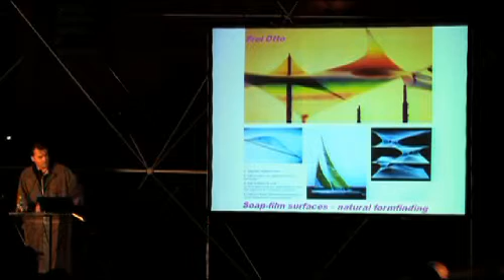And these are the kind of images we cherish and are fascinated with as models for architecture, which must have seemed outrageous and absurd 100 years ago. And Frei Otto is the only true precursor of parametricism during the era of modernism, if you like. So we're trying to create a kind of second nature, complex variegated orders, at Zaha Hadid Architects and the different teaching arenas, and to try to formulate the positive principles which lie behind this new phenomenology, new way of working.

Soft forms, of course. And that's natural to most of you here. But more than that, soft forms perhaps are able to incorporate a degree of intelligence. They're no longer just forms. They maybe have gravity or structural constraints, material constraints, logics inbuilt, which make them intelligent.

Second positive principle, or if you like, dogma, which you always demand of yourselves, and your teachers will always demand of you as students, is instead of repetition, we're talking about differentiation. So we're building differentiated systems with some kind of law of differentiation, with gradients. There might be thresholds, there might be singularities, but there's a law, a rule, rule-based systems of differentiation.

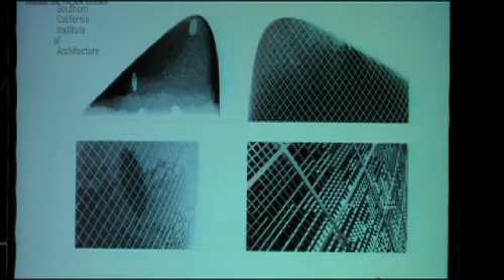And they can be applied meaningfully to, for instance, environmental adaptation of facades. So there's intelligent differentiation of the elements. You can do that by taking data sets like sun exposure and let that drive an intelligent differentiation of brise-soleil elements which are scripted off that initial data set.

But you also apply that to urbanism. We're talking about urban fields, we're talking about lawful differentiation of a field according to hopefully also intelligent data sets which are relevant.

The third category, for me most importantly: once you have a series of these differentiated systems, internally differentiated, and only if they are differentiated, we can now think of establishing correlations between them, where one system drives the other. And these are all co-present systems, which are all there and become representations of each other, if you like.

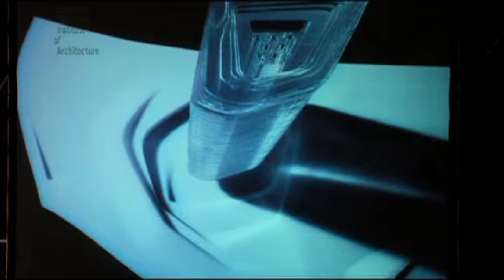These systems, some of them might be ontologically rather different and radically other. So there will be multiple systems, each differentiated, very, very different, and then you can establish correlations. Here just a simple example of a tower interfacing with a ground and creating a kind of repercussion, resonance, correlation.

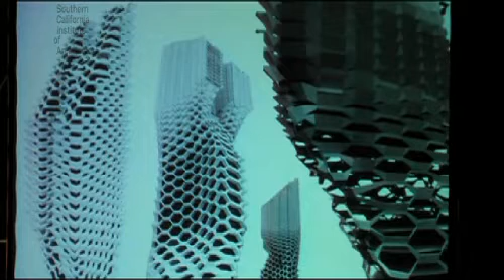Or the way the facade is correlated with the cross horizontal section of a tower, which has then to do with the programmatic, from an office area to a kind of residential area. And of course you can try to mechanize these correlations in terms of associative logics and geometry, tie these things together.

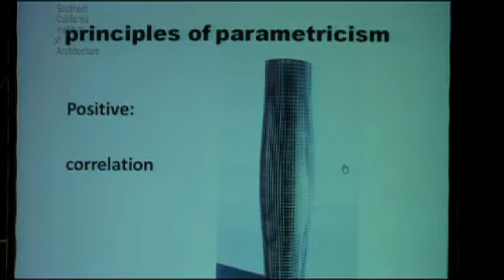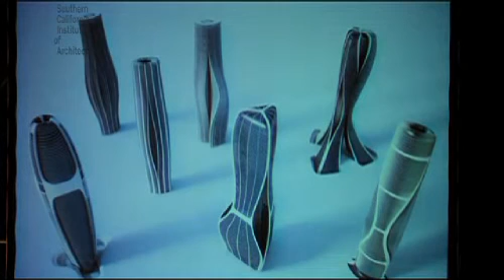So what is important here, for me in particular, is that we're moving from single system projects, which are kind of first stage and too abstract to really grip in reality, to the interarticulation of multiple subsystems, so multi-systems. And I'm just showing a few points here.

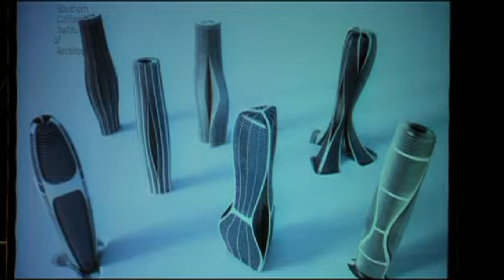This goes to every project category, but interestingly, we worked a lot on towers, and because the towers are a relatively tight type, you distinguish the skeleton or the structural system from the system of internal divisions, from the navigation and circulations of the tower, the envelope. So these are some key subsystems one could look at, isolate initially, set apart, differentiate, and then build up complexity by finding rules which bring on the next layer, settling in and connecting up. I'm just clicking through a number of issues here.

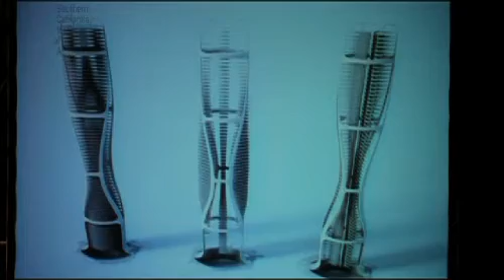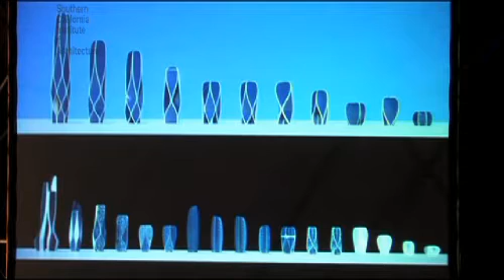The research of bringing out the skeleton in a project. Some of them are projects in the office, and then thinking of the next layer to be rule-based, scripted onto this. Differentiation of the field: as the volume shifts and changes, so must the skeleton. So the component or genotype, if you like, is internally complex, and as it moves across a volumetric input parameter, the various subsystems adapt.

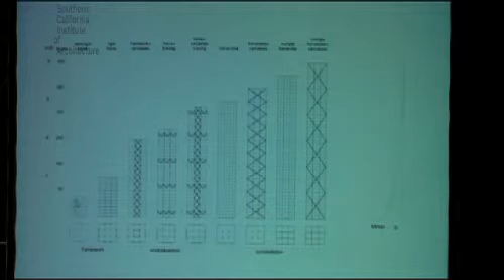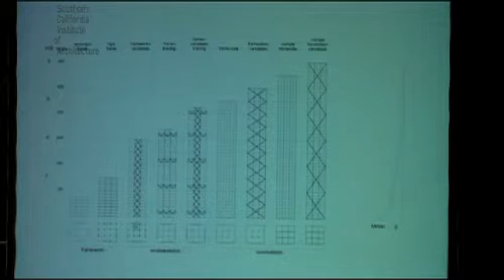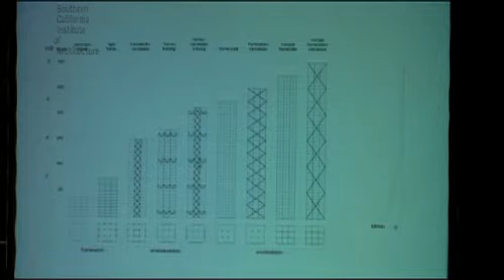So if you look at the way current state-of-the-art thinking on high-rise structures, skeletons, is presented, usually you would find that up to a certain threshold height, you just need columns, just a framework. At a certain height, you need a stiff core as a tube for stability and buckling. At a certain height further, you need to bring outriggers to tie in the outer column line with the core. Above that, you're becoming a kind of reinforced tube, etc.

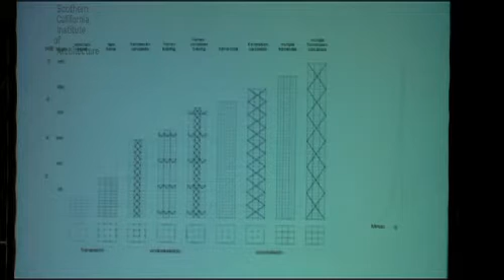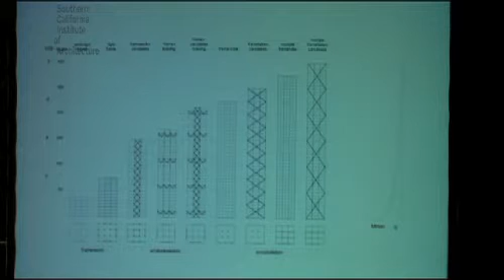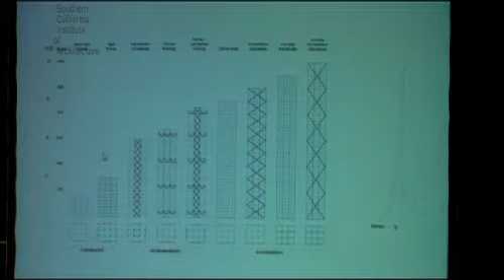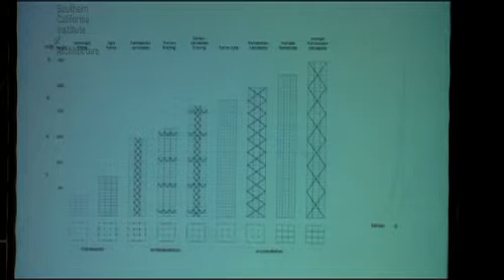So current thinking is that for each height there's a phase change to a new structural system, but each of them is treated as a repetitive extrusion up the tower, which is patently structural nonsense, if you like, because as you can imagine there's no way you need this kind of structure up here. And there is patent irrationality in these systems of not differentiating, for instance, up the primary axis of the tower where the moment has this curve. The structural system is blind to this fundamental condition.

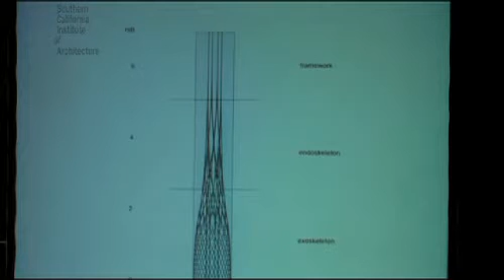So you can see some of the irrationality inbuilt in the supposed science of structural engineering, simply because there's a certain framework, certain a priori categorical approaches which prevent the recognition of this irrationality, because what we're talking about now was simply outside the thinkable of this era. It also has to do with the era of Fordist mass production and the inability to change detail, to change section, to change gradually.

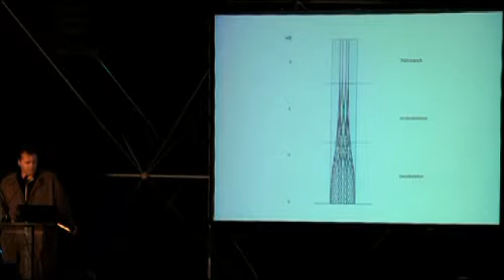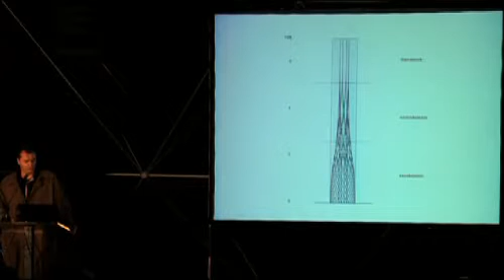Here another version, much more rational perhaps, where at the bottom you have the tube within a tube, then the tube pulls to the inside, becomes a network stiff tube, and in the end becomes a pure frame, and on the outside these are just columns. So that is a rational way of handling these systems through phase changes.

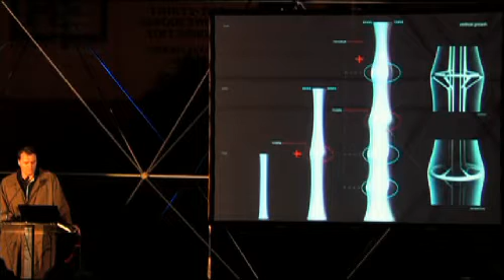There's some of the students' work actually from Vienna, and we're working on another system, which is to use the potential of a tensile endoskeleton based on this principle of stability and anti-buckling, replacing that with the tensile membrane and developing the skeleton on this basis. Again, using engineering input, descriptor differentiation, and again a continuously changing skeleton, but it doesn't mean that there shouldn't be thresholds and phase changes in the system.

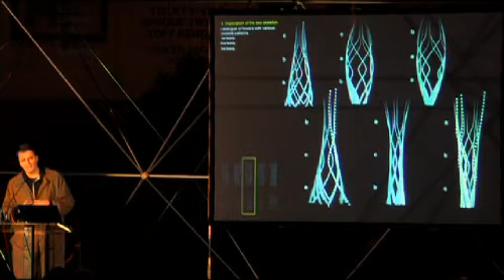These are just early studies, the first iteration of the tower skeleton, and different inputs would be just different heights or different volume proportions, and then study of the force distribution, and then of course a creative effort to invent systems which are somehow able to take that differentiation up into their own coherent formal logic, which requires intelligence and becomes a structural logic. But there's nothing one-linerish or mechanical as such about this way of designing.

It's only the setting up that is the creative act, and then of course the fine calculation is the last step, is the computational process. It's not only about the overall global order of the network of lines, but also the profiles which will keep shifting from condition to condition. The details, the connection details, the tectonics will keep shifting.

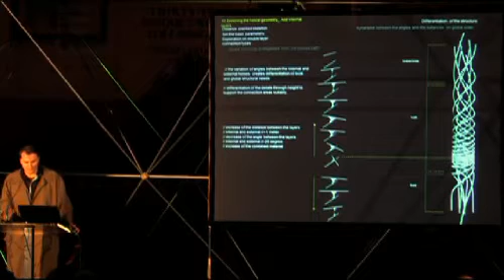But the way I've set up this particular research program is by saying I want to break that naturalized coincidence of a circulation core as a cast and placed undifferentiated tube. So that is thrown out, circulation is taken out, and we're thinking about a pure line skeleton without core. And even avoiding floors, which are integral, so the occupiable surfaces, which are usually tied in and locked in as well. So the contemporary tower is not conceptually decomposed, therefore it is so super stable, ultra stable and inflexible, because the core, the floors are tied together.

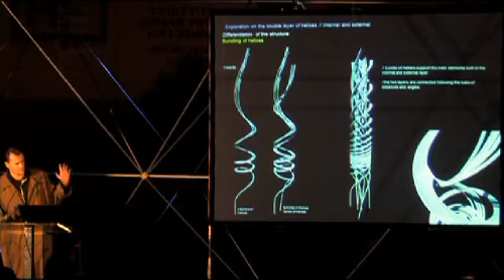We have different function systems, if you like, circulation, navigation on the one hand, the distribution of occupiable surfaces and space dividers, second, and the structural system locking each other into a kind of freeze position. And I'm unlocking this and talking about skeletons, which are pure line systems, unencumbered, and still totally open with respect to later receiving floors and occupiable surfaces, later receiving, dropping through circulatory elements. So here we're starting again a kind of differentiation of the tower.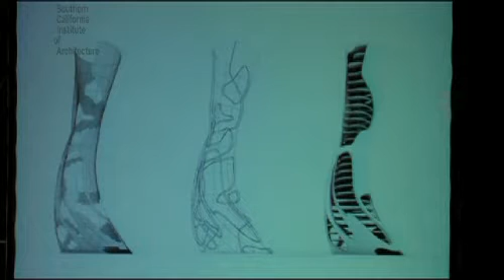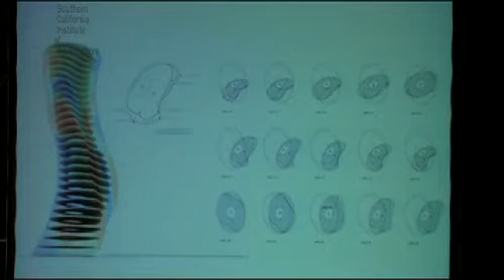Perhaps the scripting of a network, recognizing and translating that, correlating that with open and closed surfaces for the facade. No functional logic yet here, just the simple exercise of correlating, of taking one condition you've reached as a kind of input to develop a rule which delivers the next system. The floors coming in, and they react to curvature and facade by pulling back. So you have a differentiation of that. It's just a kind of chain of, let's say, correlations which build up the complexity of the tower, each time a creative invention of a new rule, and then the kind of working through of the rule.

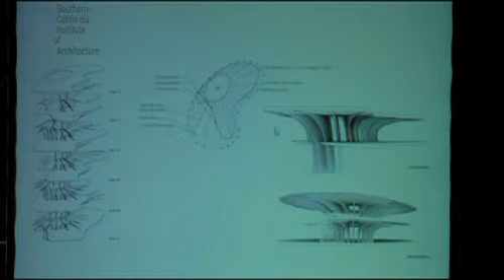The next rule is placement of the core, equidistant on the outside, projecting in would give kind of automatically a recognition of distance in terms of density of ribs. So there's a kind of local to global inferences. And then we have a rule for bringing ribs in, and we're getting a kind of coherently differentiated, lawfully differentiated, complex artifact, which nearly by default picks up static values and elegance.

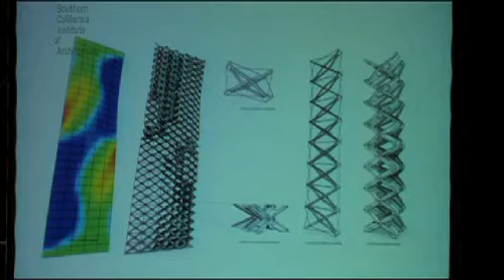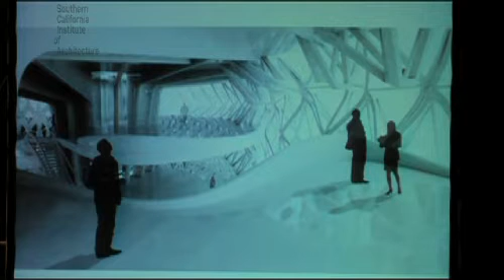Then the solid void is looked at again and translated not in solid void, but in degrees of density on a facade network. And then there's an overall sense of orchestrating multiple layers into kind of lawful synthesis where local conditions deliver information about position in a global system, etc.

So just to summarize that once more, the principles of parametricism in terms of its heuristics, that means operational definition, how to do it, by avoiding these and by following these without fail. These are fail-safe tools of criticism and self-criticism for project development and project enhancement. So you can always identify where the rigid forms are still persisting, where there is still too much simple repetition, where there are still elements unrelated, not fully related. You can always ask for further softening, further differentiation, and for further correlation of everything with everything else.

There's always more to script and correlate and to intensify the internal consistency and cross-connectedness and resonance within a project, and there's always more work you can do with affiliating and relating it back to the contextual situation. It's a kind of never-ending trajectory of project progression. Again, the advantage of this is intensity of relations within, and that is an advantage.

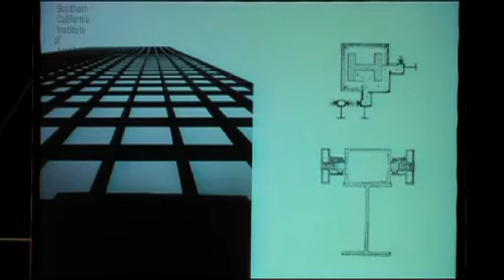And I set against that kind of, if you like, artistic project, but I put that in brackets, of driving and desiring the conspicuous amplification of differences. So that a difference in curvature is driven into radically different conditions of ribbing, of gridding, of networking densely, so with phase changes, and yet coherently shifting between these. They're not collaged. And you can also imagine that a contemporary life process under this one big roof is a kind of modern model of everybody is the same, doing the same thing.

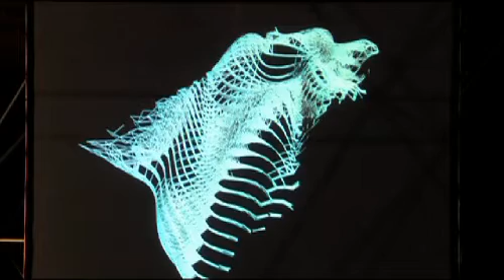And this one you can imagine being much more prone to the development of versatile conditions, different atmospheres you migrate through, and which bleed into each other rather than being discrete zones. So I think this is much more pertinent image and vehicle of contemporary life and communication processes than that big Foster dome. So the emphasis on differentiation, the amplification of deviations rather than the neutralization and compensation.

There's also the difference between explorative design research versus problem solving. Problem solving side is the kind of technique side, the engineering side, the parametric side, the Foster side, and here we're talking about teasing out unknown potentials of these techniques, but with a direction set by the parametricist heuristic principles.

And we're on the kind of cusp of moving from an avant-garde condition into a mainstream, I hope. And as with respect to avant-garde, we're talking about even built works are hypotheses, manifestos. But I think some of our works go beyond that and are becoming compelling success stories in the real world.

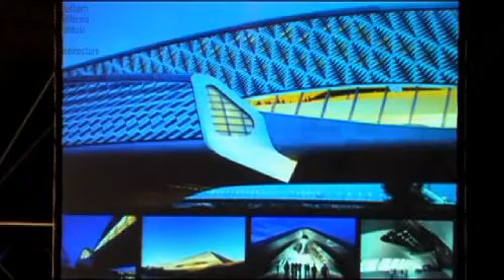So, the Innsbruck project, for instance, the Chanel project, some of these projects I will come back to later and explain what they are, how they are high performance projects which deliver a kind of social process and conditions which could not have been achieved and delivered by modernism, postmodernism, deconstructivism.

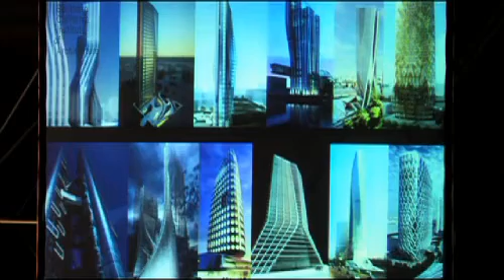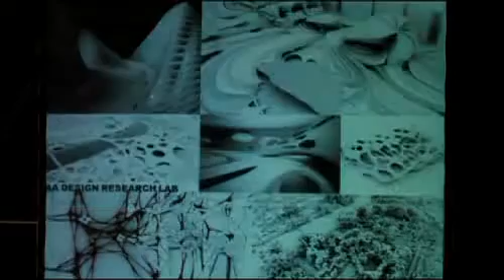I'm just clicking through some of this material just coming out of the office, just to see the richness of vocabulary and types of structures we're addressing. There's a kind of unity within difference, or difference within unity. And we're moving across various scales, endless forms, similar to the kind of organic forms cropped up by evolution. But these endless forms are there to organize and articulate life.

We should not forget this. There's no self-serving self-sufficiency, only temporarily within a kind of research division of labor. There could be pure formal research, but that makes only sense in a context where there's a desire to apply, to test out, where others are learning and observing and bring it into its purposes. So form powers function. That's the new thesis. Spatial organization sustains social organization. Can we demonstrate, control, and predict this? To a certain extent we can, I would argue.

So if you look at the history of parametricism, in fact it's the history of the whole evolution of architecture. We have some fundamental thesis here that social order requires spatial order, and that society doesn't exist without an architecture, without a structured built environment. And as society evolves, it can only evolve if it is able to enhance and more intricately structure its built environment as well. Architecture provides the long-term social memory as necessary substrate of cultural evolution.

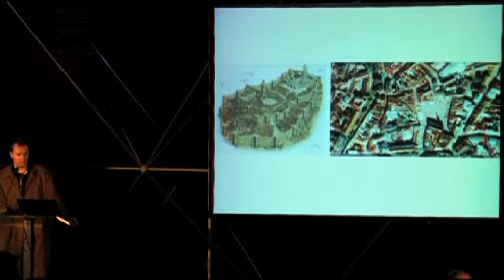So here you can see that a kind of flock of apes, if you like, is able to build up a kind of social structure with the help of a material substrate of evolution, which is this built environment which gives more structure and complexity and gives stability to these evolving structures and complex relationships through architecture. And that is moving through various stages. And at each stage there is a certain model which is proliferated across the landscape. It becomes the compelling state-of-the-art type.

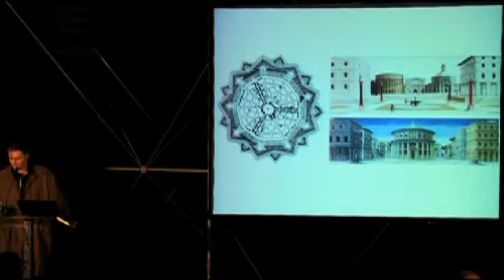The medieval city sitting in a landscape, more or less equidistant, equal size, was covering Europe. In the Middle Ages, it's a succeeding model, there's nothing else. At that point no city is larger than 3,000 inhabitants, if you like. All of this would have been just an unconscious evolutionary process. Then at a certain moment there's the Renaissance, the recognition that one can understand this process, intervene in this process, and establish a plane of invention, theorizing, and conscious projecting forward.

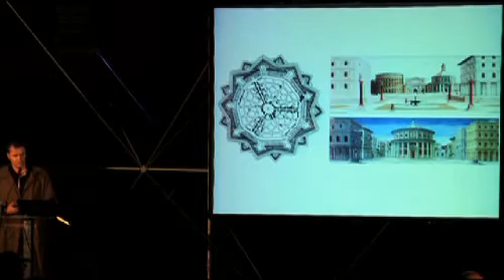The moment of architecture starts when the architect separates from the construction, master building team, moves from the site to the plane of the drawing as an arena of speculation, and on this plane of speculation is able to deviate from traditional models, and that requires argument, discussion, theory. And that is the beginning of architecture 500 years ago. And it shows up in the landscape with a new kind of rigor and confidence. From there it quickly moves up. This is still the amorphous self-organized. This is the imposed and designed. It moves outside of the city and cuts through the landscape to the horizon and builds larger structures.

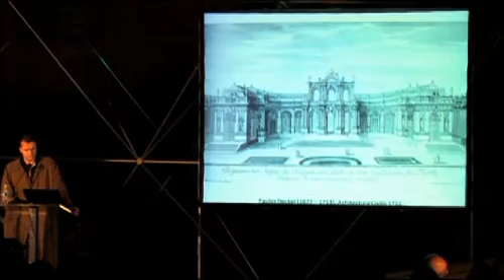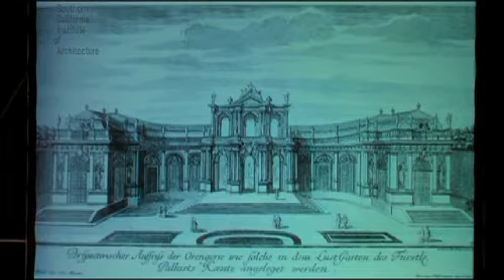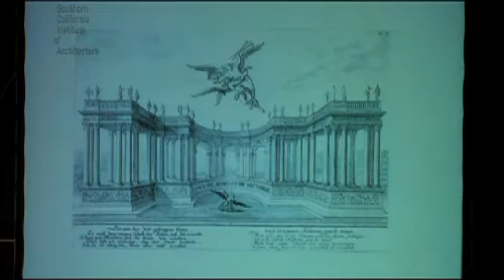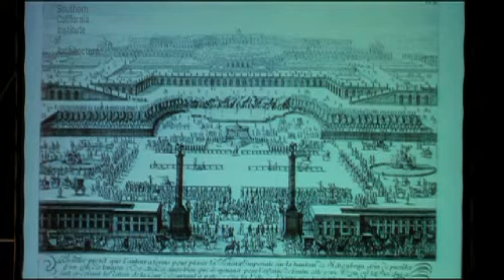With the Baroque and the mercantilist economy, national economy, you have these visions and vistas. On the global level and the local level, the Baroque can comprehend and give order and coherency and tie together more elements. The Renaissance was still building additively. The Baroque is using curvature, convex, concave, asymmetries in the parts to tie together larger structures into a unified whole. So it's been observed that the detail of Baroque, the curvature, the asymmetry in its parts allows the overall to gain coherence, and a Renaissance architectural repertoire applied to such ambitious complexes would be impossible. The composition would just fall apart into pieces.

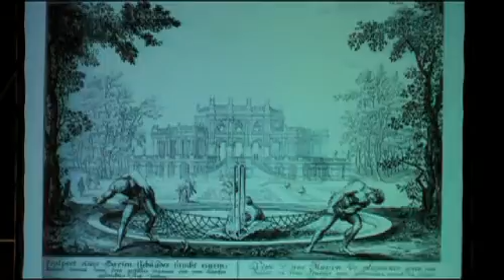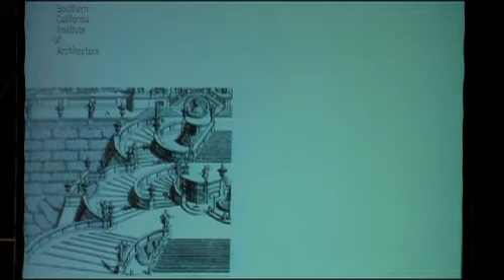The Baroque can cope with that, and you can see here the asymmetry of the part empowers the perception and orientation in terms of the overall, just like the amorphousness and unlikeliness of an amorphous element is a precondition. The asymmetry becomes the condition of the power of the then symmetrical composition. And we've worked with that aspect, and you can still allow partial asymmetries to exist, and you still tie together a very, very powerful image.

Modernism, just a few more points. The era of mass reproduction breaks with symmetry, breaks with proportion, breaks with proportional systems, and allows elements to just stretch out into infinity, and allows compositions which are asymmetric, diverse, but there is a very, very sharp set of principles which are, let's say, the dogmas of modernism. You can analyze any modern composition, it will always show the following principles.

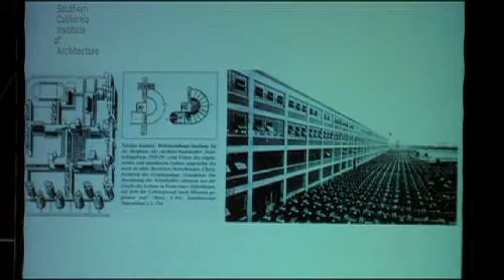It will specialize and separate out parts which are internally repetitive with the minimizing of connection. That's the overall order. Bauhaus, and the rationality of this is also clear. You will separate out the apartment block from the administrative block, from the workshop, minimize connections. You have the liberty of disposing each with its own floor-to-floor height, depth, and fenestration pattern.

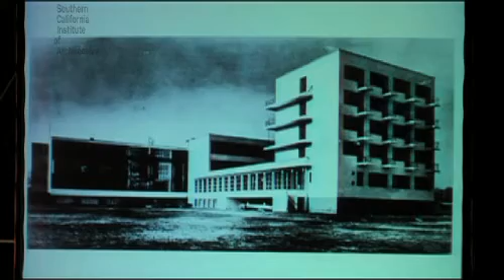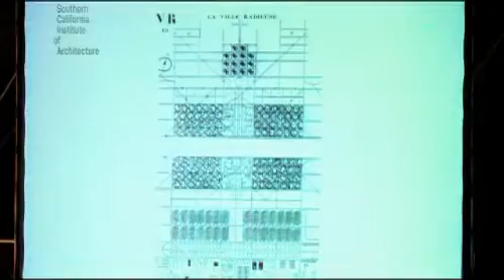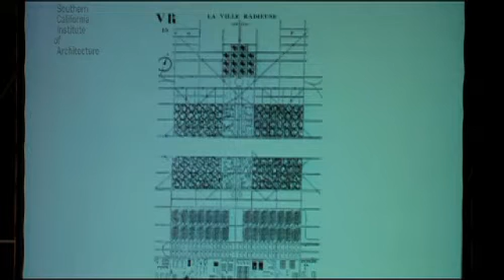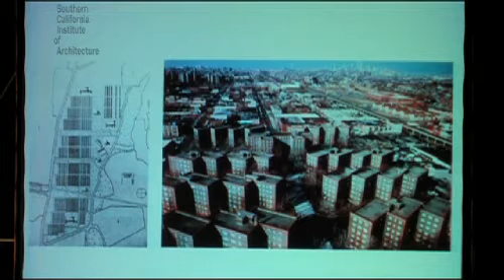And these principles of separating, specializing, and internal repetition are universally applied. That's also the ordering principle of the functionalist city. Each zone could be radically different and other, but separated out and internally repeated. This goes through all the sub-styles of modernism. So as we move from the white modern to the brutalist, from the brutalist to high-tech, to metabolism, even including Archigram, these principles I was just discussing are always 100% adhered to.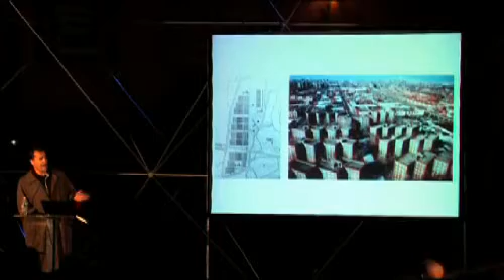The allowing for each individual functional component to be solved on its own terms, separately, developing its own physiognomy, separately, but always internally repeated, and always remain separate and attached minimally. Now, these principles of zoning and separating and optimizing and repetition, at a certain stage during the development of the 60s, 70s, move into crisis. You have these kinds of dystopian projections. These are ironic extrapolations by Superstudio of precisely these principles.

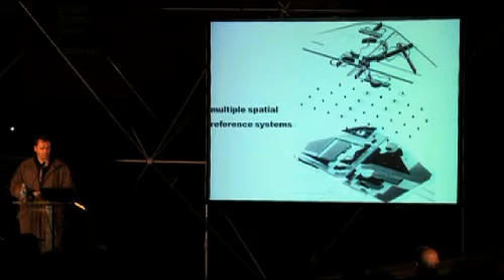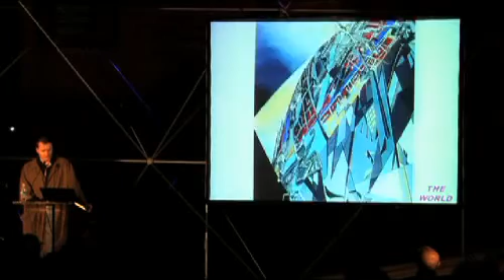And you have radical deviations. Suddenly, you have these interpenetrations, these disorientations, fragmentations, a radical new principle of superimposing instead of having one next to each other. In the difference, we now have one on top and through the other, coinciding in the same territory of these differences. And that was a monumental move and shift and discovery. And since then, we have these kinds of multiple systems going into correlative interarticulation.

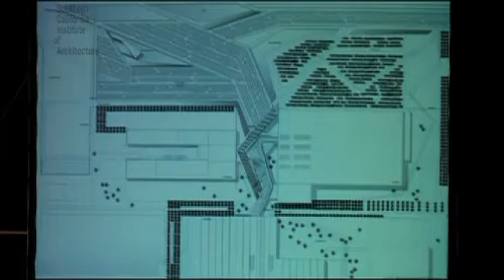Just showing a few images of these new principles of parametricism in terms of field spaces and interlacing and avoiding of discrete components. These kinds of principles we've described in the Rome project for the museum applied to the BMW. I'm just noting this here because this is a kind of high performance production space, which is no longer an experiment, but has been selected by a company who wanted what seemed most productive, most effective, most pertinent to their works.

And again, I want to focus here that there's this kind of open field space, and we're taking the car park, we're taking the different prosaic matters and materials of this world and bringing them under a strong formalist field logic. Everything here, whether it's the structure, the ribs, the conveyor belts, the lighting elements, the handrails, are brought under the spell of a relentless formalism, and yet this form powers function, I would argue.

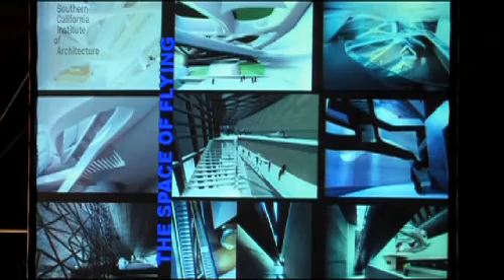And there's issues of endless space, endless continuously differentiated space, deep visual penetration, but there's this kind of ordering logic which helps the legibility, the navigability, the avoidance of corners, etc. And these moments of simultaneity and intensification of visual relations within such a space are in these structures. So just to rehearse briefly the historical trajectory from the medieval to the Renaissance to the Baroque.

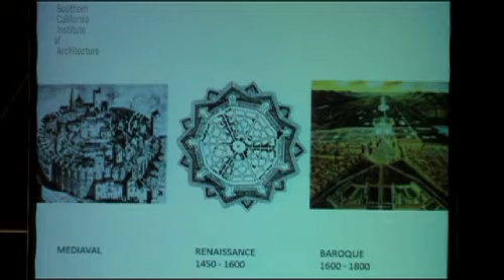Here's the line where architecture starts and moves through accelerated steps through these epochal styles, which are also at the same time epochs of socioeconomic development. Modernism, postmodernism, deconstructivism, leading to parametricism. So the attempt here is to think about an alignment, an ordering of the key eras of architecture. So this part in my book doesn't really belong to architecture. The medieval vernacular, the Romanesque, tied to feudalism, is just tradition-bound building.

There's perhaps a transition in the Gothic. I was always struck: is Gothic part of architecture in the sense I'm defining here? Not quite, because in my definition, architecture is this fully self-conscious, innovative discipline with authors staking claims, projecting forward, backed up by writing, backed up by graphic speculation, compelling with a new medium of perspective. So a lot of these things are missing in the Gothic, or less fully researched. The Ancien Régime, for instance, in France, paradigmatically.

Then we have neoclassicism, historicism as the era of bourgeois capitalism and the nation state. Modernism, tied in with Fordism as a production paradigm, and international socialism, and I would argue the social welfare state, the universal consumption standard. And in this era, in a sense, the Soviet Union was the development model of that era, and it came to an end. The crisis of modernism is at the same time the crisis of Fordism and international socialism.